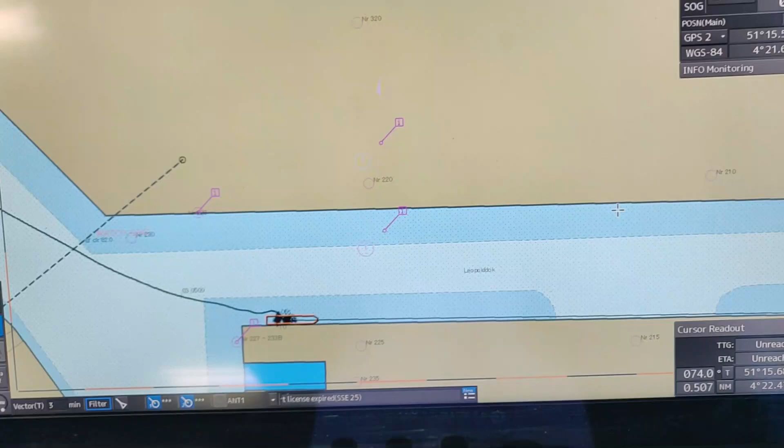Hi friends, good morning. This is the JRC JAN-9201 model, and today I would like to show you a few details and go-throughs for the ECDIS, just some basic things you can check when using this ECDIS, and give you a short run on how everything works and what else you can do with it.

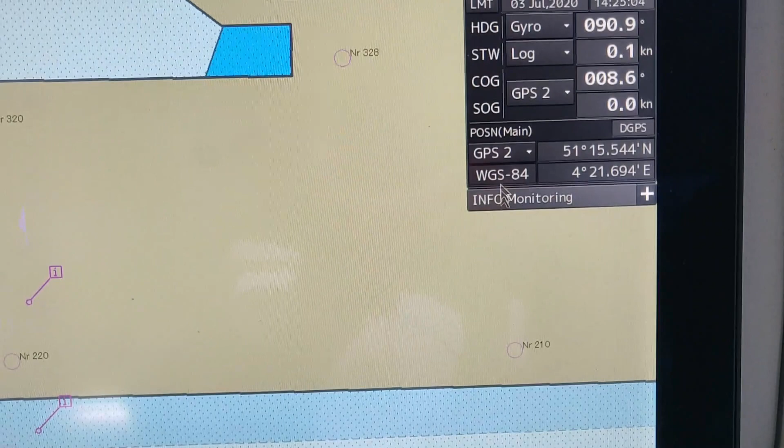On the top right corner there's an option showing your gyro, speed through water, GPS, and your main GPS position. You see it's written 2 GPS - normally every vessel has 2 GPS, so you can switch from GPS 1 to GPS 2 however you like and select whatever is preferred. There's also an option for DR mode, in case your GPS fails you can just use the DR mode and go on with that.

On the top corner you can see the compilation scale. Right now it's zoomed in a lot, so for those who don't know how to show the scale to the vetting surveyor or use the appropriate scale for the ECDIS, it's here - you see this 1:1 mark. Whenever you click here, it will show you the appropriate scale used for the ECDIS, in which all the features, markings and everything is clearly visible.

Next is the true motion, relative motion option - it's like the ECDIS north up, head up mode, course up mode, and this is the symbol display. It's set to custom right now because when you select all, it shows all the symbols and that's too much clutter. Standard will show you just enough to make a plan, but not enough for when you're monitoring a course or going through a passage. So you have a custom option, which I'll show you later how to go into, and you can change all the features.

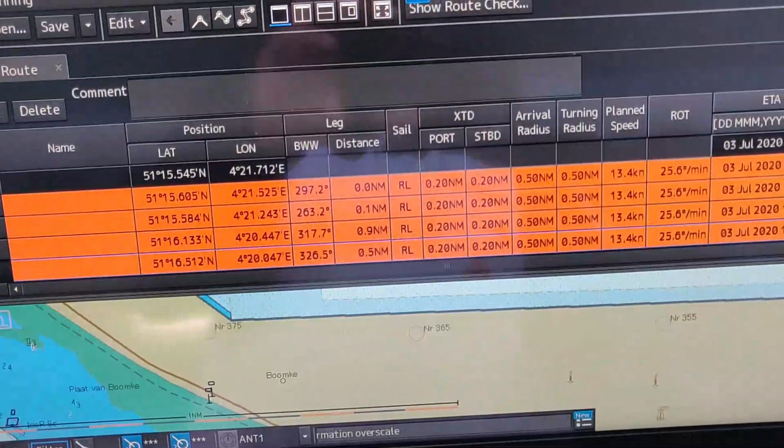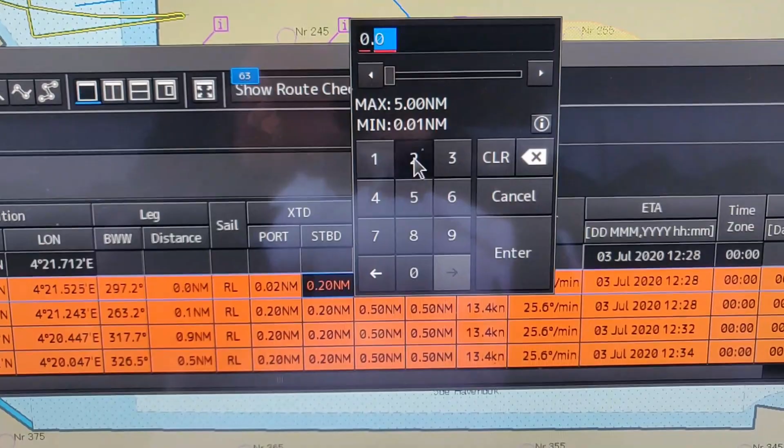Now you can see the crosstrack limit is exceeded, and I'll have to make adjustments, plus the speed here is too much. How do we change that? We go over here, and you see this is the crosstrack limit - you can change it in the settings as well, but that's not so important, you can just do it over here. Like for now it's 0.2 or something, and I can change it here. You can see the crosstrack limit has considerably reduced and we won't have too many errors. I'll do the same for the other parts as well, right here.

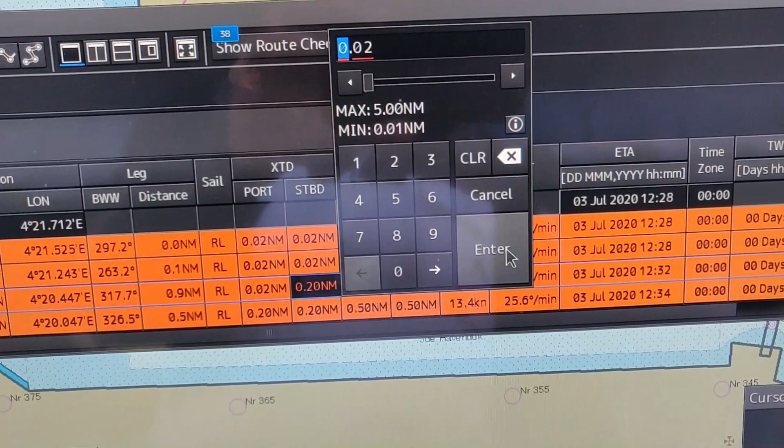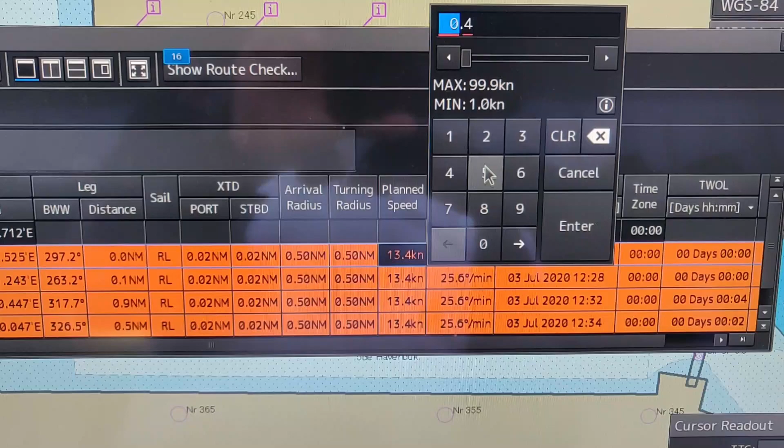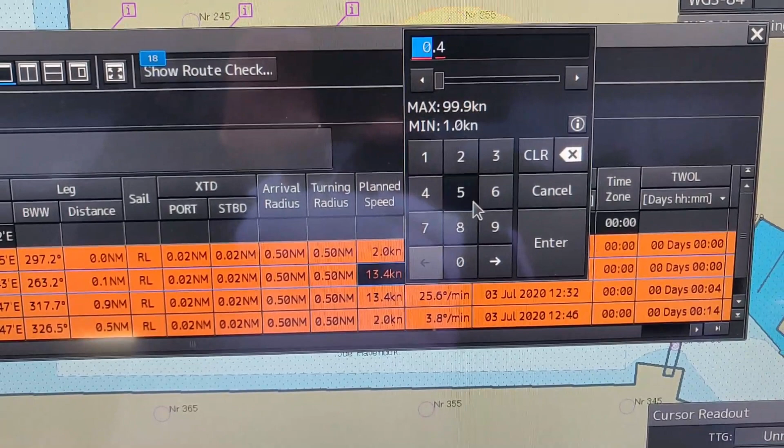This is the option for the turning radius and arrival radius, which you can change accordingly. I will show you that as well. So here, since we are just at the berth, I will keep it to 2 knots maximum, because that is the maximum speed we will be coming to near the berth. And in the passage, since it's very close, I will keep it to 5 knots, not more than that.

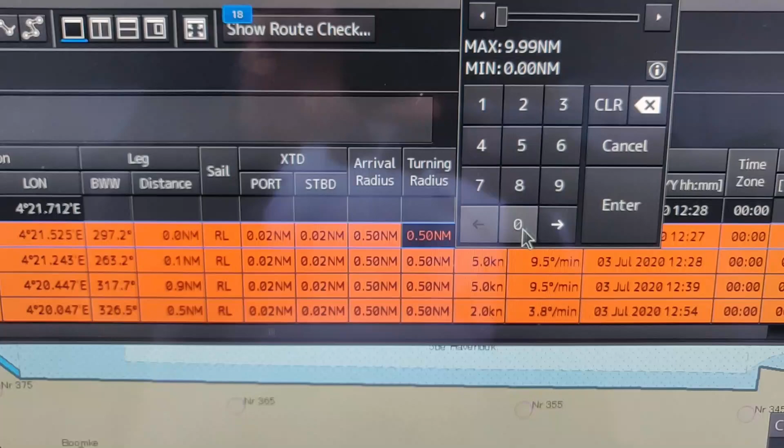Now you see this part, this is because the turning radius is too much. So to reduce this, to not give you an error, what I will do is reduce my turning radius, and now you see it is changed. So this is what you have to do.

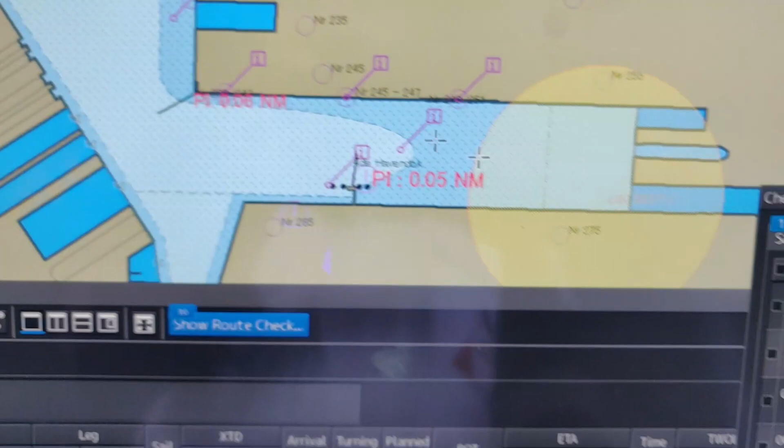For example, once you have done this, you can go to route check and it will show you 16 things you have to look into. Now in route check, this is the part where it will show safety contour. So these are the errors. You have to change your safety contour settings and then the errors will go.

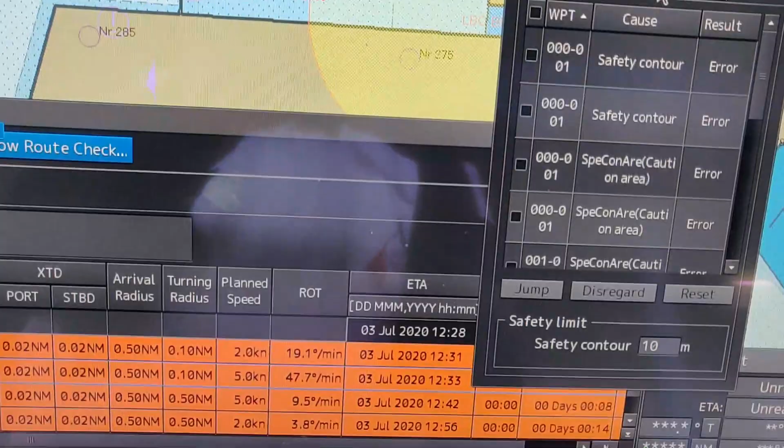There is a vertical clearance, that's probably something you cannot change, and this is a special area, so these are the warnings. The main thing you have to check is your limit check, whether you are in the limit or not. So here it shows you the planned radius is under the minimum turning radius. You can change your minimum turning radius.

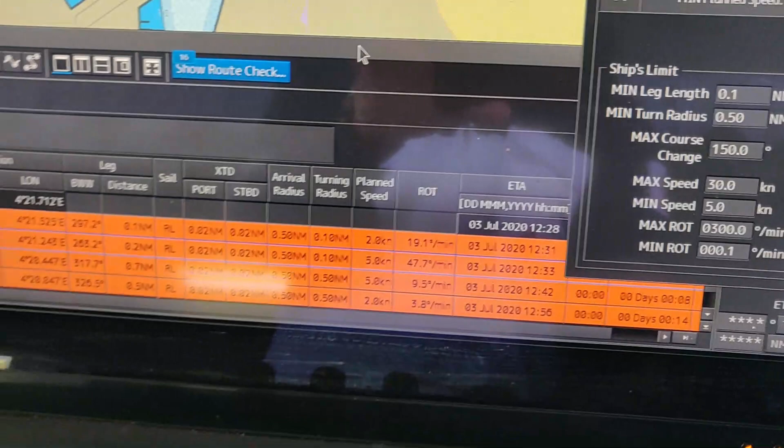Now just to ensure that your ECDIS is working fine and your route that you have made is perfect, and it will accept the ECDIS to accept the route, first you have to save this in whatever name. Now I will save it to AAA. I will close and save this.

Now when you have to actually go for the passage, you will go to menu, click on route monitoring, and then on route monitoring here you will go to the saved passage plan, that's AAA, which I had saved earlier. Click here and you see the route is done.

Now if the ECDIS sees some error in your passage or some route that it cannot create, it will show that there are some errors out here. There will be a box which will show that there are some errors in your route and you will have to change it. So that's how, when I told you that when you go to the particular...

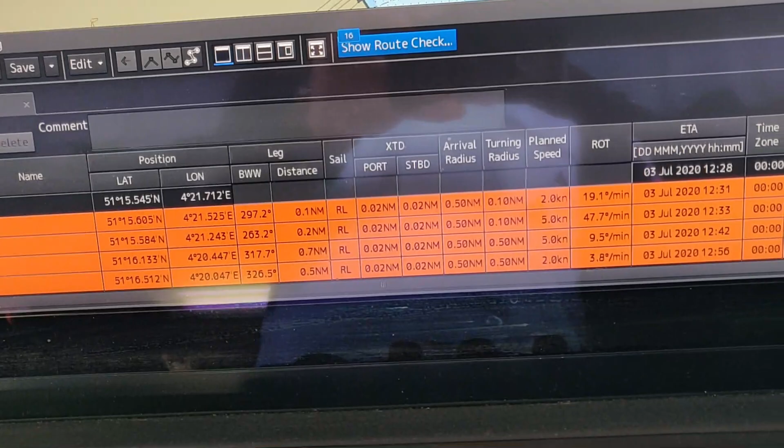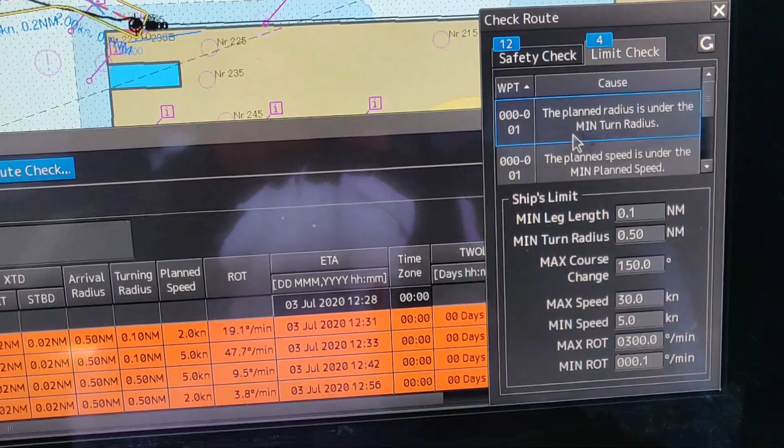...route on route check, in your safety limit there will be a marking which is saying that the leg length is shorter or something like that. I don't remember the exact words, but that's how it will come.

So when there is an error like that, I would suggest you to change your speed and do something with your turning radius, reduce the turning radius, and probably that helps a lot. So once you did that, save it, go to route check, check your routes. If everything is okay, click and do disregard. This is probably something limit check you cannot change, and then you can save your route.

So guys, here it is. This is how you create a route, make a route on your ECDIS JRC JAN-9201.

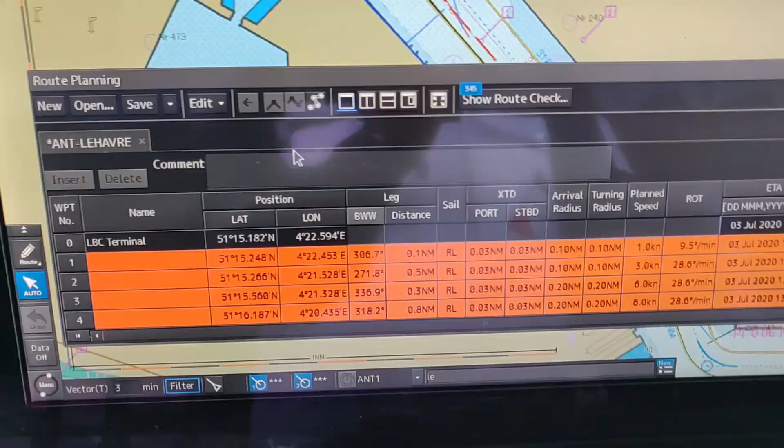Okay guys, there was one more thing I would like to tell you, that there are certain hacks that you can carry out in your ECDIS. These are just some things that will help you save time when you're making your passage plan.

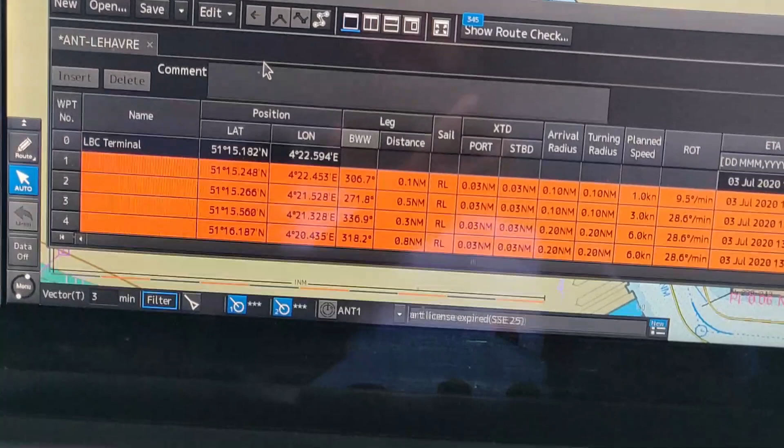Let me start by telling you, now suppose if you have any route and you just want to go back on the same route and you don't want to make a new route, you can just open the previous route on which you traveled. You can click on Edit, you can click on Waypoint reverse. As soon as you click on Waypoint reverse, the whole route is reversed.

Okay, and then you can just save it in another file and go to monitoring and you're done right there. Now there is something else I would like to show you.

Suppose you want to merge two routes, like if you're going from point A to point B, and then point B to point C, but on the next route you just want to go from A to C, skipping the B part, you can directly do it. There is something called insert waypoint. Let me show you.

Now this is the route that I made, AAA, to show you guys, which is out here. Let me just exit from the monitoring for a moment. I unloaded. Okay, so this is the route.

Now let me make another route, open, just so that I can show you how it works. I will make new and click something from this jetty out here. I will click over here and suppose I go till here. Let me just change this Crosstrack Limit so that it is easier for you guys to understand. Okay, so this is done and I will save this as BBB.

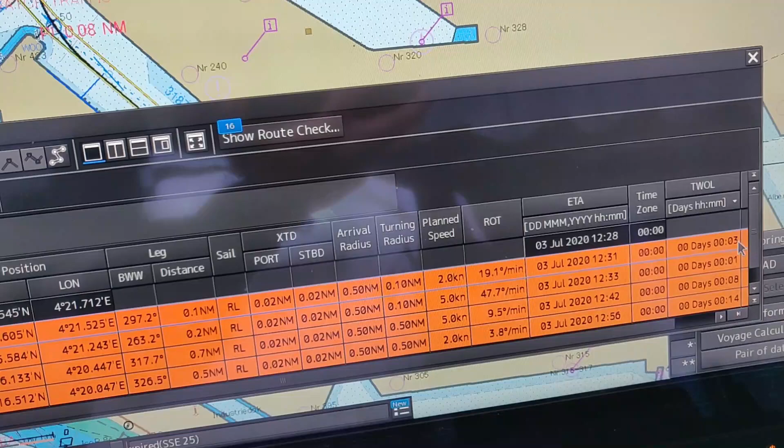Now suppose if you want to go from here directly to here, skipping this part right here, what you do is you merge. Once both route files are open, click on the first part, go to the last waypoint out here, and right click on the number 4, the last waypoint. There are several options, but I have never used this so much because it hasn't come in handy so much.

Now I will click insert waypoint. I will click on BBB, which I used, and I clicked OK. As soon as I click here, you see the route has merged.

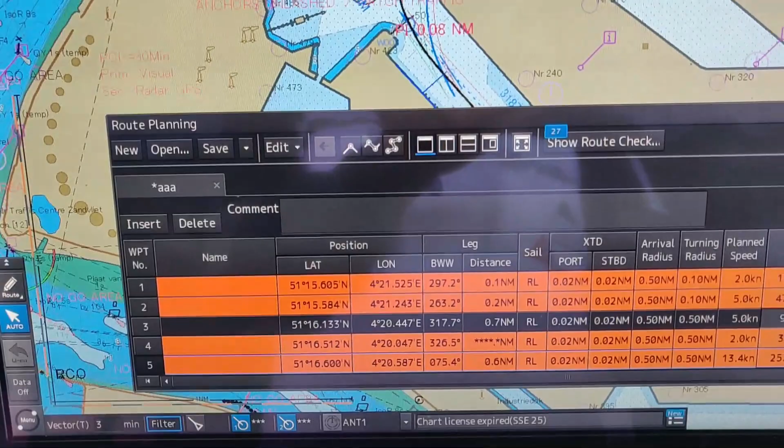Now I don't want to go over here or here. So what you can do is take this waypoint and delete it, and now you can see the route is like that. Now what do you have to do? Just a few adjustments. Basically you take this waypoint, right click, move your waypoint a bit, and then, like I said, when there are errors like that, you can change it by changing your turning radius. So now I change my turning radius out here.

This is just a short explanation, and let me tell you guys, this feature comes really handy. If you want to quickly make a passage plan and you don't have time but you have the routes, you can just use this option and merge two routes and then you're done. You see, it hardly took me a few seconds, and my next route is already made.

And you can save this route, save as, click on save as, and save it under another file name. That is it, and then you're done. So it is that simple, and it's a very handy feature. You all can use it. Most of you must be knowing about it. Some of you who don't, please do use it. It's a very good feature.

Next, I want to tell you that it is a bit complicated when you start actually applying it in an actual passage plan. If you edit a route, edit some point, make sure you don't save it directly. When there is a route from point A to point B and you have made changes in the first or second route, I would advise you, after those changes, do a save as, or else your old passage plan will be overwritten and you will lose the previous one. So I would suggest you make the changes and then save as.

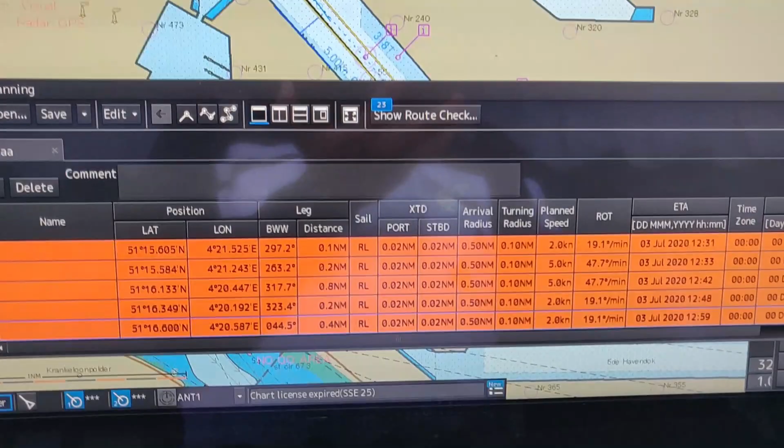On the second part of the passage plan, also make the changes and save as, then you can merge the files and make a new passage plan. This way you create a new passage plan while your old one remains in the ECDIS and won't be overwritten. Please don't make the mistake of just making changes and saving without doing save as. I've done this mistake several times, so I advise you not to do this.

Since I showed you how to save as, save, import, export, next up I will show you. Hi guys,

I haven't actually been able to demonstrate how to merge two routes, but now we just got a voyage, and I would like to show you how I can merge two different routes to save your time. So let me start by telling you that we have got a voyage from Le Havre to Algeciras.

So now the thing is, I have a voyage from Antwerp to Le Havre, and another voyage from Le Havre to Algeciras. So at some point in between, I have to make a passage plan joining these two routes. Let me tell you how I am going to do this.

So I am deleting this. I am going to check the waypoint. It somehow looks unclear, let me just remove this one and unload it to get a clear picture. Now it shows waypoint 10, so I am going to delete till waypoint 10.

I hope guys this gives you a better picture of how to merge two routes to save your time. Now I have deleted till waypoint 10. Can you see this? Now what I'm going to do is move this waypoint right till here, till the point that I want to merge.

Now we cannot make a direct approach like that, since we are in a Dover Strait, we are in the TSS. So what I'm going to do is just right click over here. Please bear with me because my ECDIS is a bit slow. Okay guys, as you can see, I have brought this waypoint right here and I have dragged it out here.

Now I'm going to just insert one more waypoint and get it out here, because this is how I will intend to approach a little bit far, so that I am in the direction of the approach of the TSS well before I am entering the TSS.

Now you see my route has already been made. Now all I have left to do is merge. Just to cross-check again, let me see how I'm going to approach, and this is the lock gate. Here I'm going to come out, just like that.

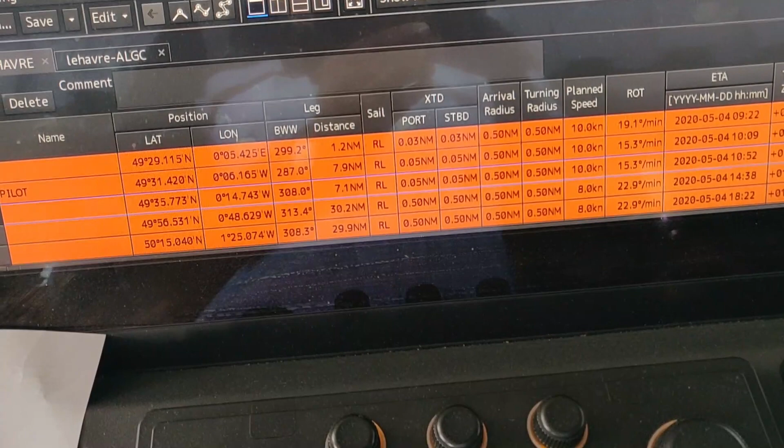So you see out here, I can just make it 0.5, 0.5, and yeah, looks fine. Everything is okay. I'm going to save this one.

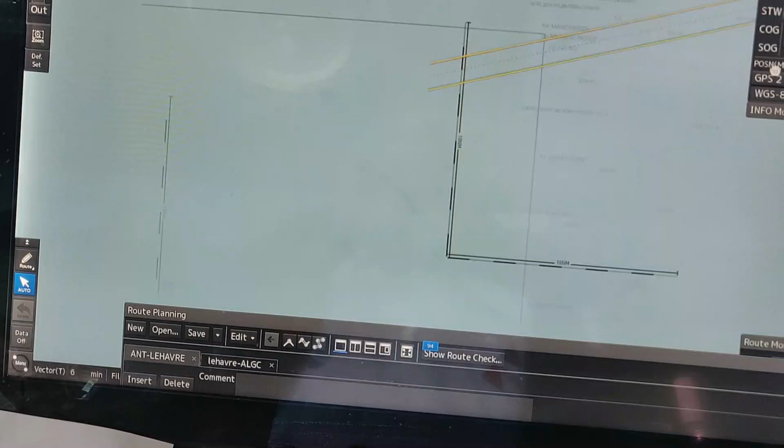Now we know that my route has been coming from here, and now this is where it ends. So this is the point where I want to merge both the routes, since I saved both of them. Now Le Havre and Antwerp to Le Havre, and Le Havre to Algeciras.

Okay, so now Le Havre to Algeciras is open. Now I will right click, insert another route, and I will insert Antwerp to Le Havre right here, and click OK. So now you see there will always be a waypoint created like that, so you just have to right click and delete that waypoint, and everything will be fine.

Now you see that route has already been made. It just took a matter of few minutes and a few adjustments, and your passage plan route from one place to another has been created. So now all that's left is to save the route, that is Le Havre to Algeciras, and you are done.

You close this, you check the route, everything seems to be fine. Out here everything is okay. Done. So my route from Le Havre to Algeciras is done.

I hope you have understood this tutorial. Now I will show how to export this route onto your pen drive. Since you have saved it, you can click on this option, click on export, click on the .csv file, and just type in Le Havre

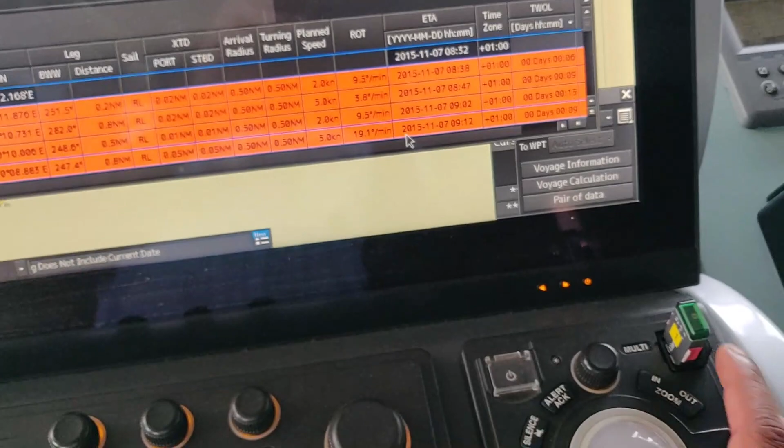to Algeciras, whatever, and then just click OK, and the file is saved to your pen drive. Now you can transfer the CSV file to your PC, and in a few minutes I will also show you how to export it to your planning station.

Right now we are using NAVTOR planning station, so I will also make a video of how to export and import files in your NAVTOR planning station, and how to also ask for permits.

Okay guys, now since the guidance or procedure on how to merge two passage plans is clear, you can check it out once again. If you are a bit confused, let me tell you, in initial stages it is going to be a little bit difficult to try and merge two waypoints, but once you understand the concept behind it, it is going to be more easy and more convenient.

Like I showed you just a few minutes back, it just takes a few minutes. If you have route A, B, C, you just have to cut B, and you can get from A to C. It is that easy. It just takes a few minutes, and then the rest is how fast you are with your chart and everything else.